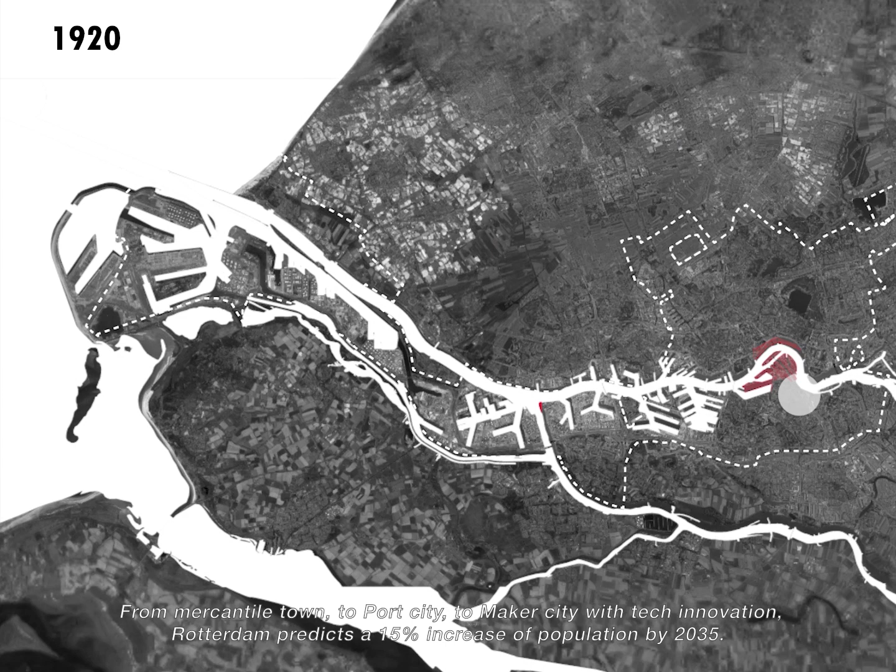Feijenpoort, the gateway to Rotterdam South. From mercantile town to port city to maker city with tech innovation, Rotterdam predicts a 15% increase of population by 2035. The city aims to reshape the economy by expanding towards the south.

Located at the entrance of Rotterdam South, Feijenpoort intersects 8 neighborhoods. The district accommodates some of the most ethnically diverse populations, yet has the lowest quality of life in Rotterdam. Situated at the bottleneck of the north and south, Feijenpoort suffers a disconnection of its east and west. The west part is characterized by homogeneous housing and broad lanes.

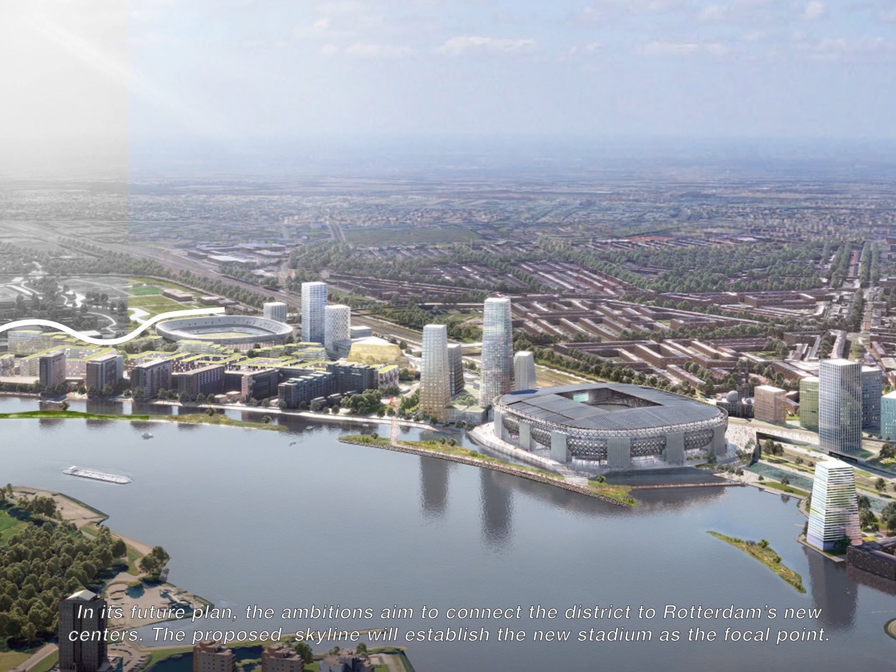In its future plan, the ambitions aim to connect the district to Rotterdam's new centers. The proposed skyline will establish the new stadium as the focal point. It introduces a new tidal park and high-rise harbor which overshadow the existing buildings. However, the plan doesn't address the diagonal axes into the rest of the neighborhoods.

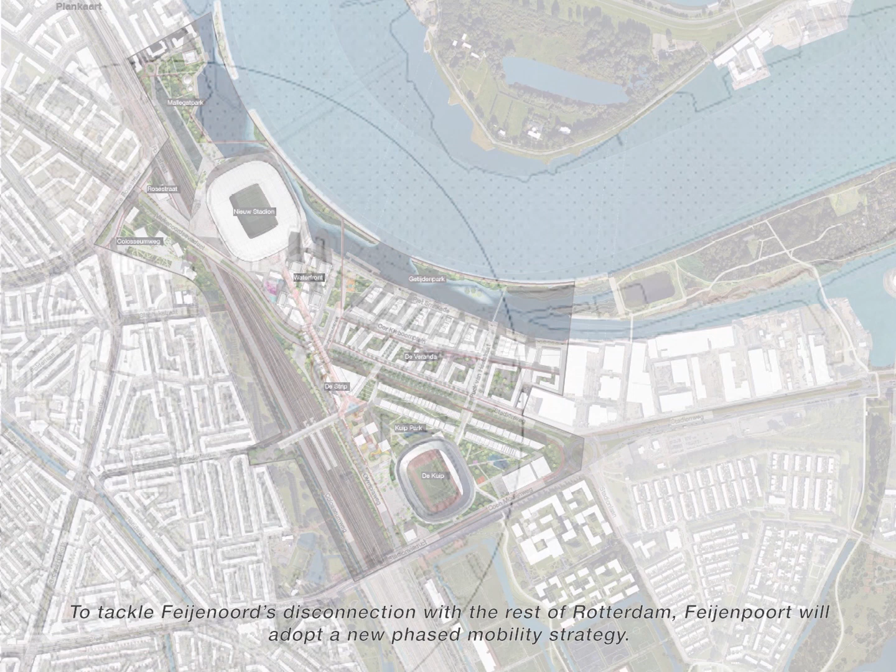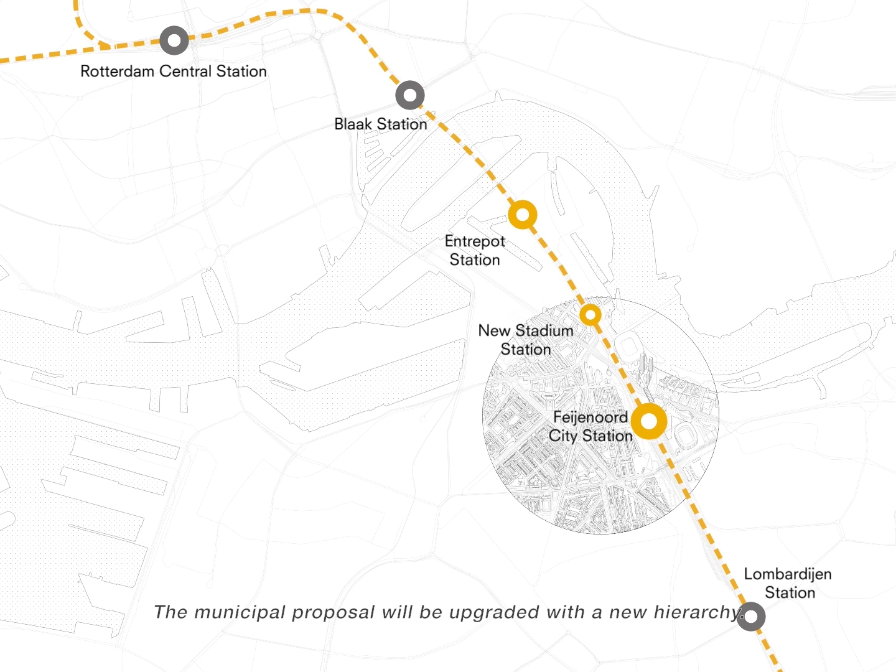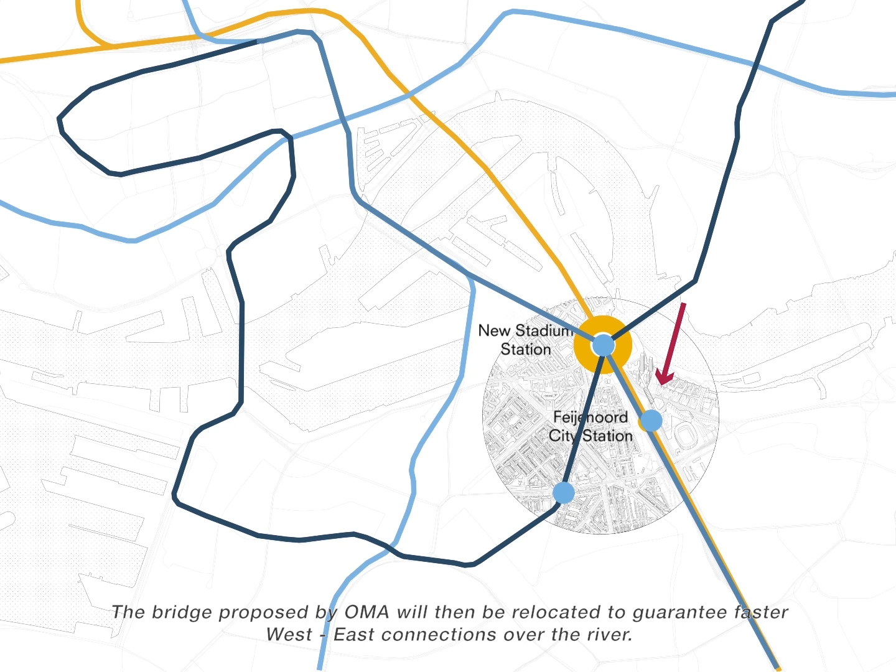To tackle Feyenoord's disconnection with the rest of Rotterdam, Feijenpoort will adopt a new phased mobility strategy. The current Rotterdam Zuid train station will be phased out. The municipal proposal will be upgraded with a new hierarchy. The Metro F will be rerouted and intersect with another new line at the new station. The bridge proposed by OMA will then be relocated to guarantee faster west-east connections over the river.

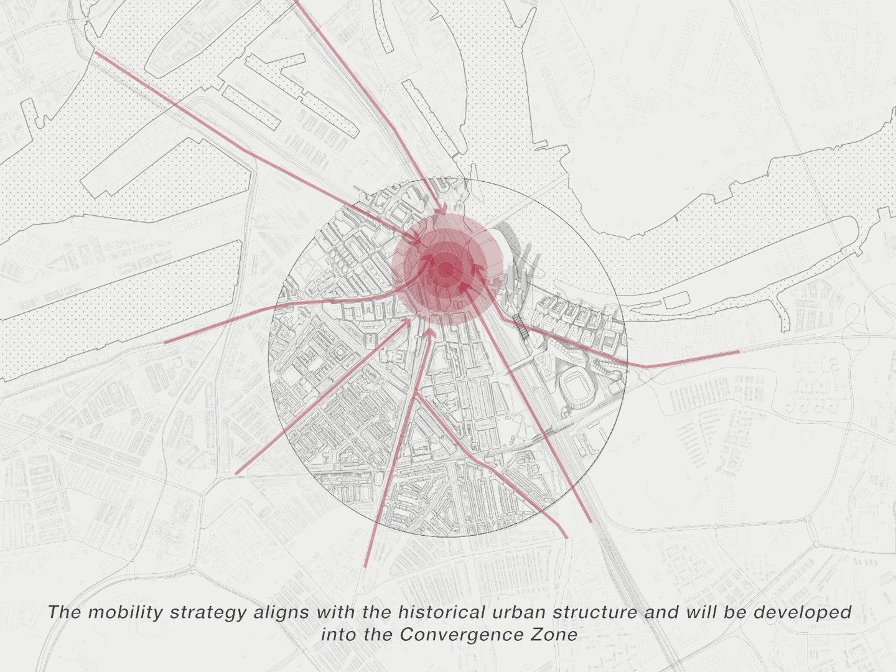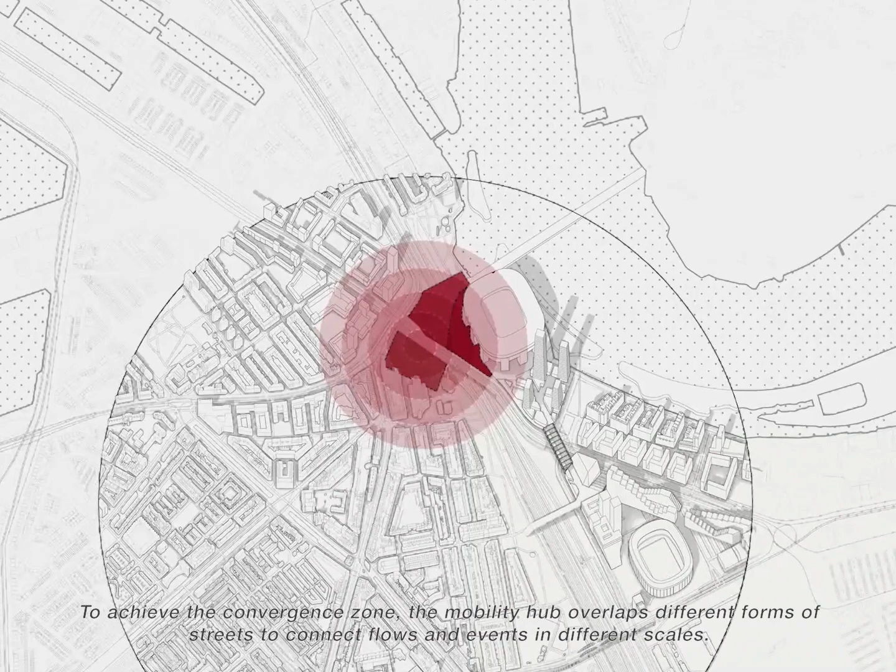The mobility strategy aligns with the historical urban structure and will be developed into the convergence zone. From the convergence zone, axes of diverse characteristics will radiate and flourish throughout the whole site. To achieve the convergence zone, the mobility hub overlaps different forms of streets to connect flows and events in different scales.

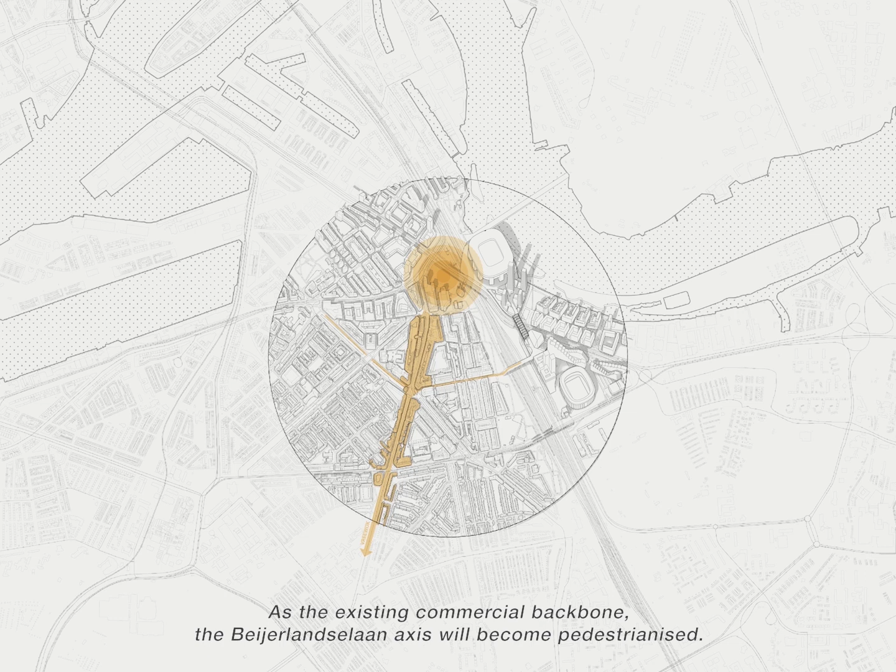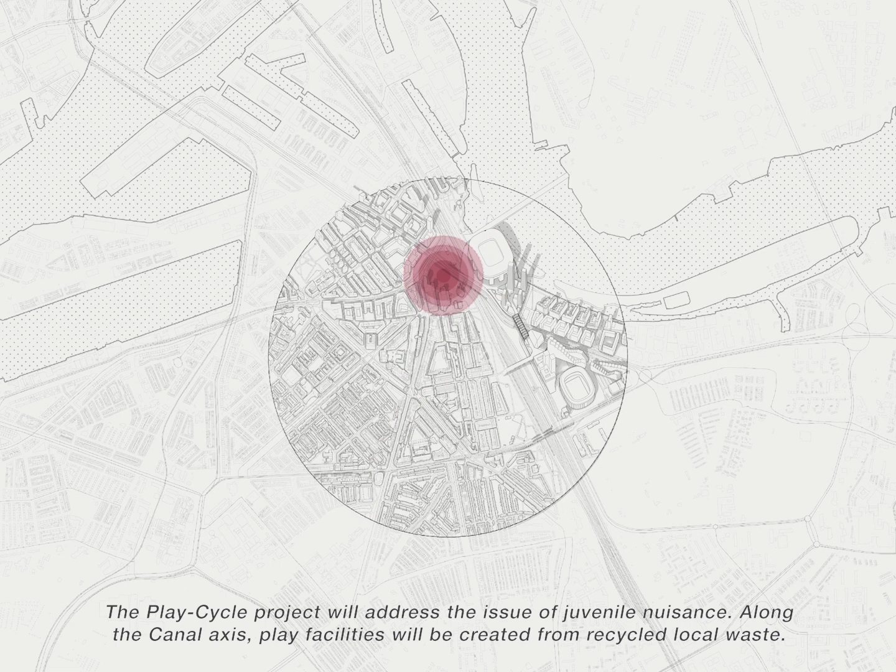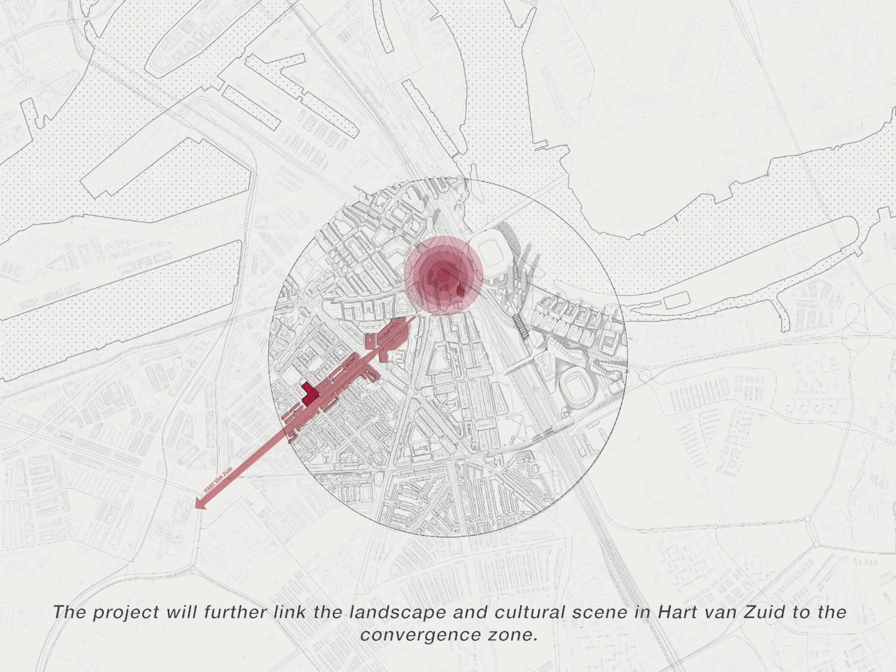As the existing commercial backbone, the Beijerlandselaan axis will become pedestrianized. The esports center on this axis will connect different age groups through gaming to reduce loneliness and increase social cohesion. The Play Cycle project will address the issues of juvenile nuisance. Along the canal axis, play facilities will be created from recycled local waste. The project will further link the landscape and cultural scene in Hart van Zuid to the convergence zone.

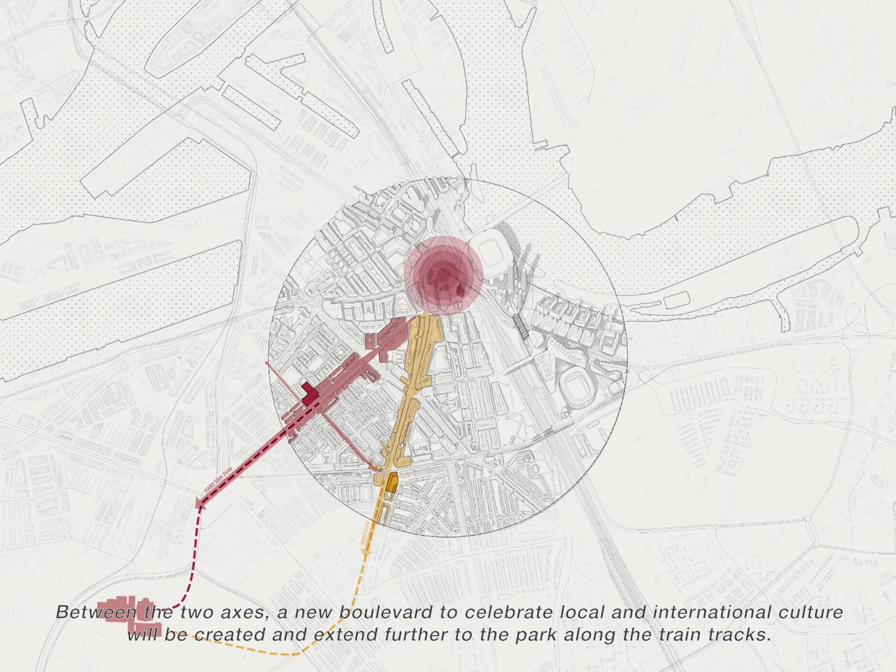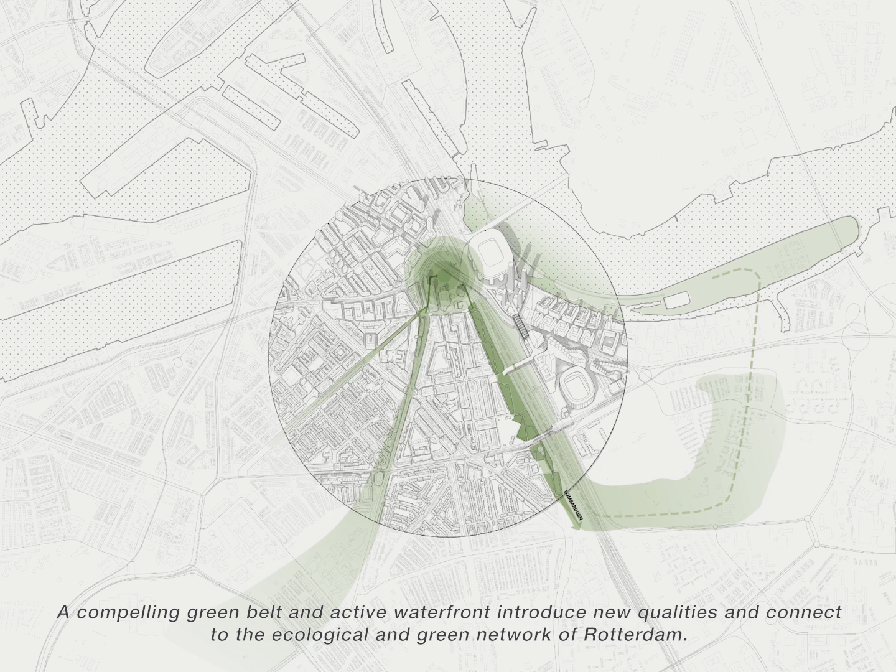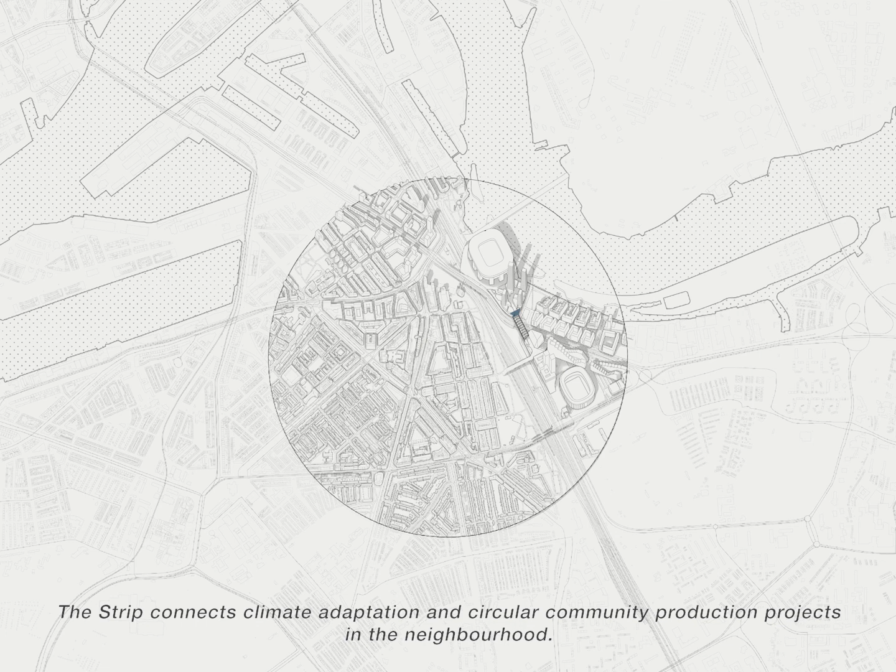Between the two axes, a new boulevard to celebrate local and international culture will be created and extend further to the park along the train tracks. A compelling green belt and active waterfront introduce new qualities and connect to the ecological and green network of Rotterdam. In order to freely develop youngsters' minds, the Academy for the Arts generates well-being by a new creative and green environment. The strip connects climate adaptation and circular community production projects in the neighborhood.

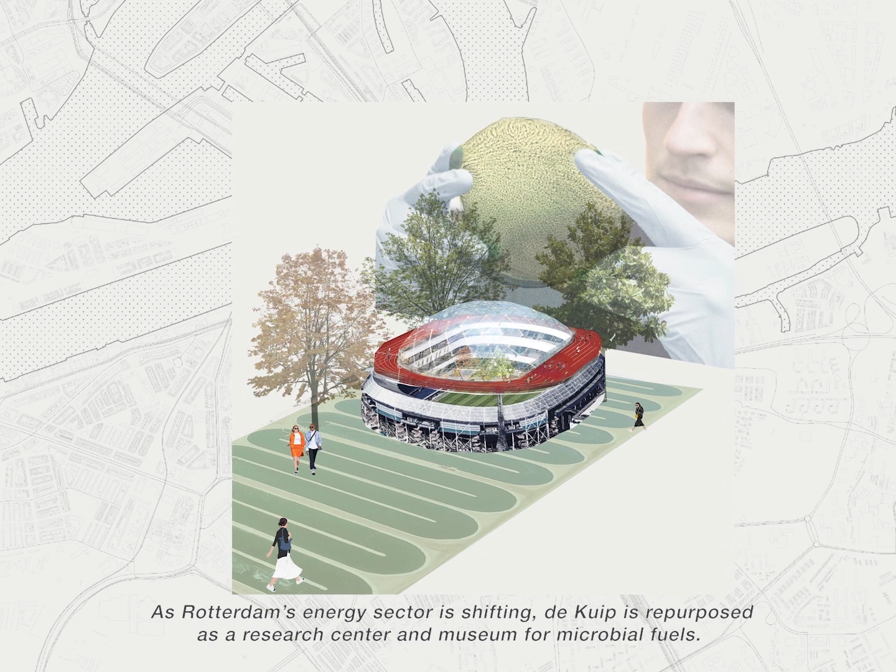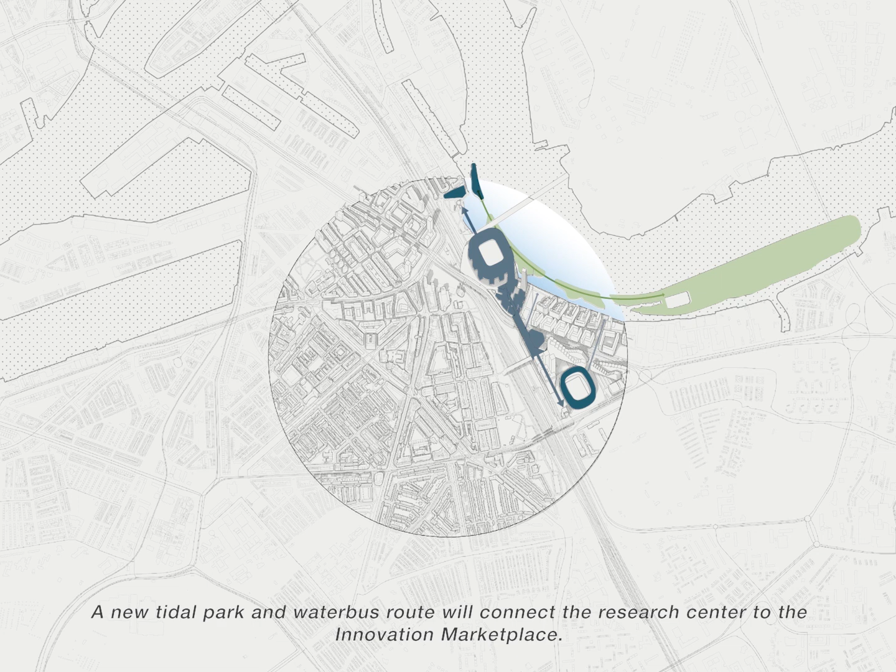As Rotterdam's energy sector is shifting, De Kuip is repurposed as a research center and museum for microbial fuels. This provides a future for port industry workers on site. A new tidal park and water bus route will connect the research center to the innovation marketplace. The marketplace promotes new forms of localized production and exchange for the agro-tech and creative industries, whilst linking to the vibrant Afrikaandermarkt. Both projects work towards Rotterdam's sustainability goals, whilst connecting to innovation centers at a city, national and international scale.

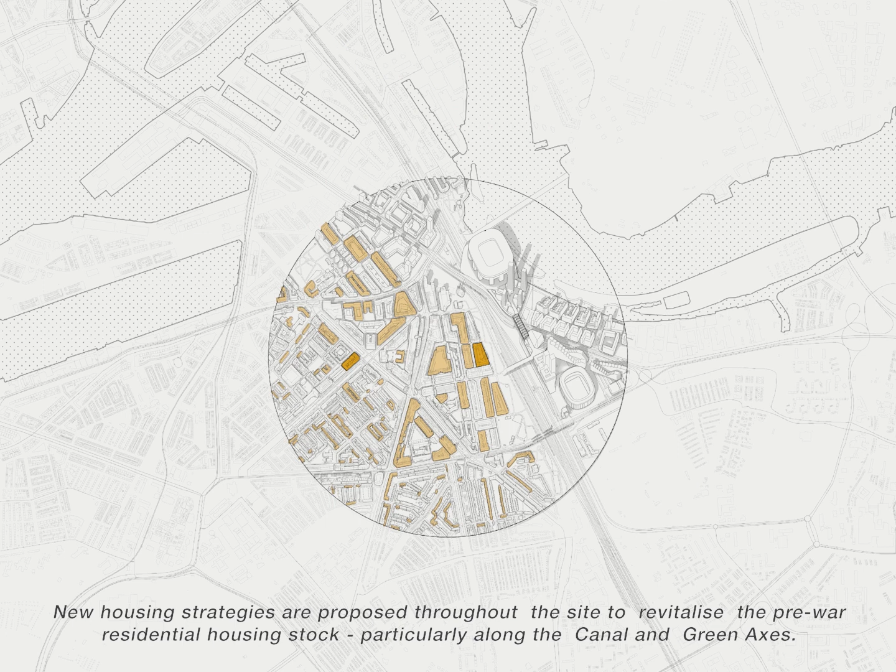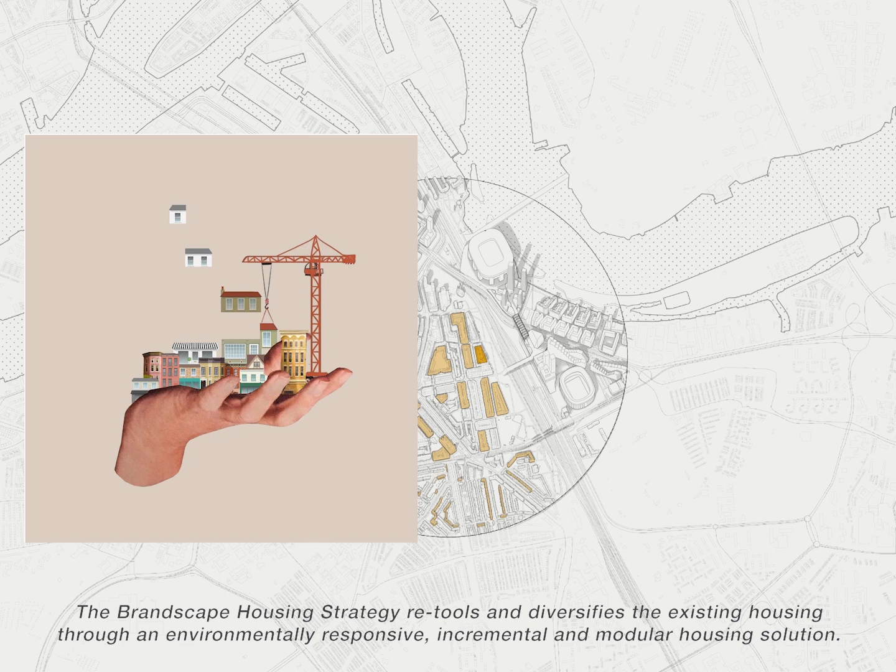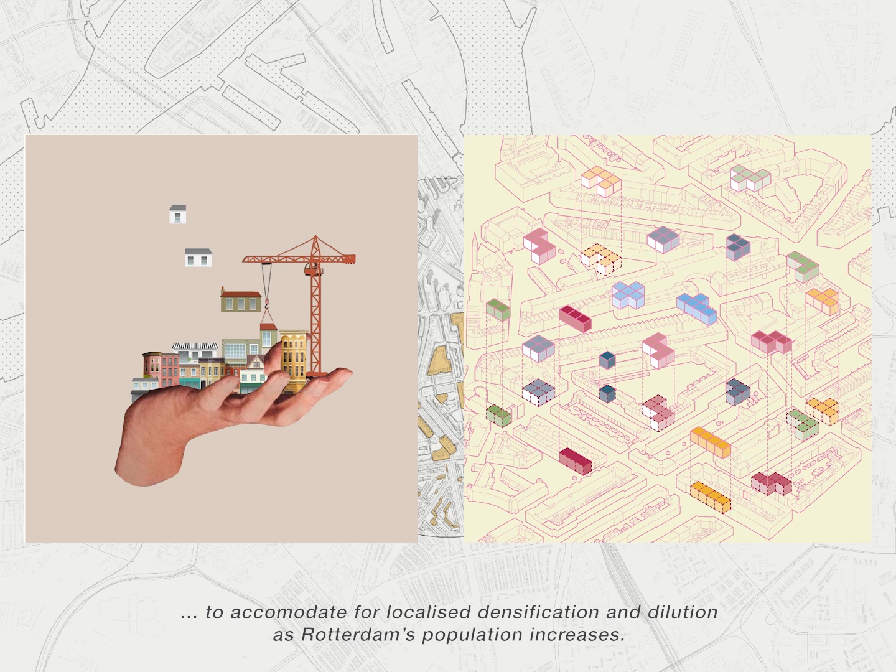New housing strategies are proposed throughout the site to revitalize the pre-war residential housing stock, particularly along the canal and green axes. The Brandscape housing strategy retools and diversifies the existing housing through an environmentally responsive, incremental and modular housing solution. The open housing system creates adaptations to the closed housing block to accommodate for localized densification and dilution as Rotterdam's population increases. Both projects will improve the standard of living in Feijenoord, but can be applied throughout the city.

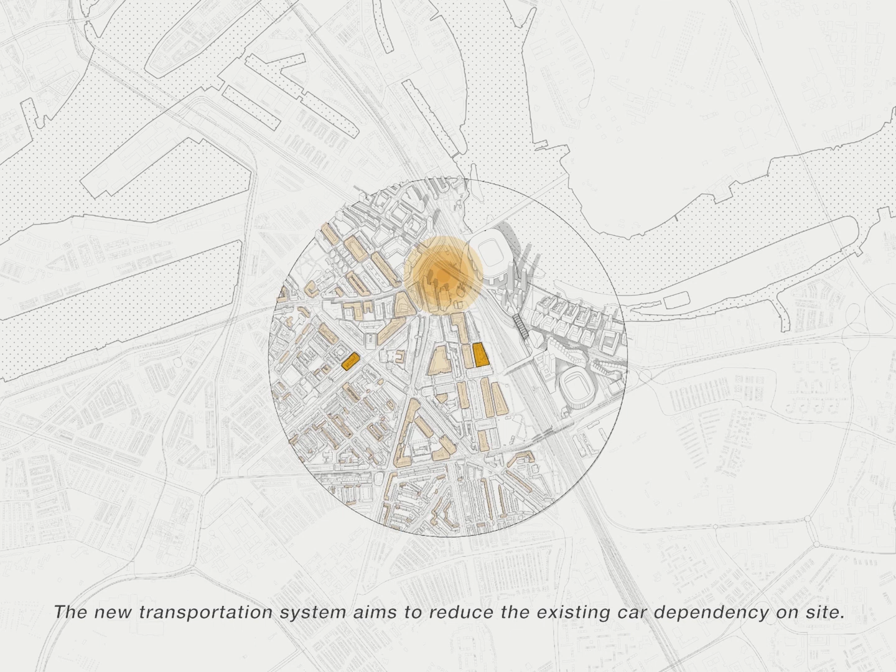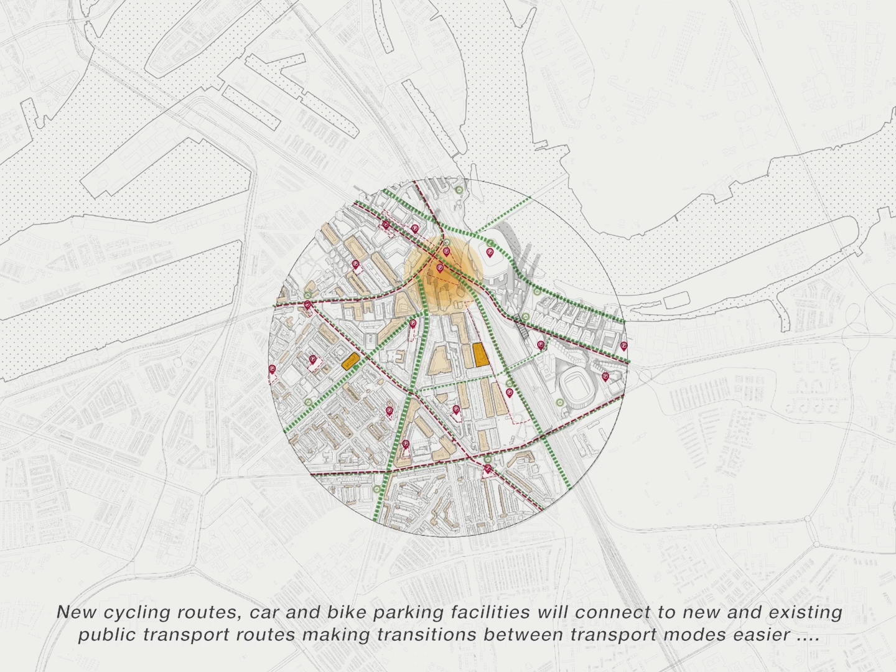The new transportation system aims to reduce the existing car dependency on site. New cycling routes, car and bike parking facilities will connect to new and existing public transport routes, making transitions between transport modes easier and green zones throughout Rotterdam more accessible. With our proposal, Feijenoord is envisioned to become the gateway of Rotterdam South.